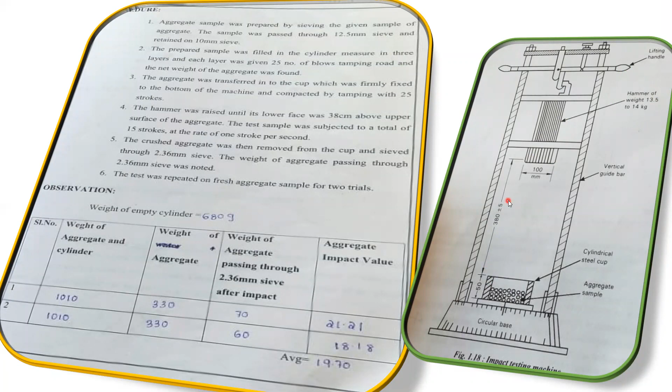Yeah, this height from here to here, the height will be 380 mm, right? And the weight of this hammer will be around 13.5 to 14 kg.

Now coming to the procedure, we'll quickly go through the procedure once. Yeah. So aggregate sample was prepared by sieving the given sample of aggregate. Again, you have to do the sieving here. How we are going to do? You have to pass the aggregates through 12.5 mm sieve, and whatever is retained on the 10 mm sieve, that we need to take. The prepared sample was filled in the cylinder, measured in 3 layers, and each layer was given 25 blows with the tamping rod, and the net weight of the aggregate was found.

Again, in this particular cylinder, you have to fill the aggregates, whatever is retained on 10 mm, you have to fill into this. So when you are going to fill, you have to make sure you're filling them in layers like we did in the previous case. Fill it in first layer, give a tamping for 25 number of times. You have to do the tamping, then again fill the second layer, give 25 number of tamping, again fill it, again give the tamping, so that this top surface will be filled with all the aggregates. So the tamping is done so that you don't have any voids there.

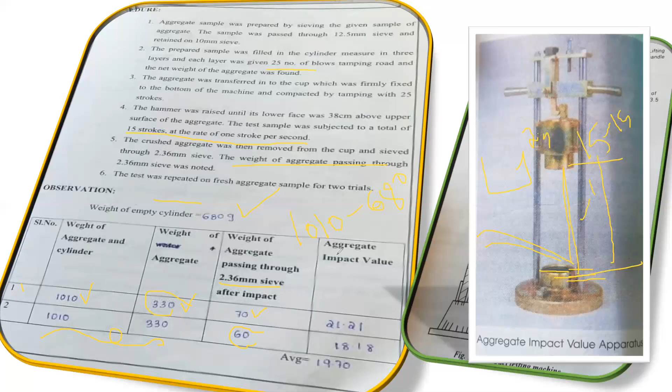So this is one trial you have done. Similarly, you can try to do another trial also. So in the other trial, this is what they have done. Again, you have taken the same thing, and finally in this case only 60 grams of aggregates you have got that passed through 2.36 mm sieve. Now coming to the aggregate impact value, again it's the same formula. How do you find this? Whatever is passed through that, that is 70, this is passing, right?

70, that is, let us say this is W2 for me, and this is W1 for me. What is the weight of the aggregate? That is 330. Since I want to find it in terms of percentage, I'll multiply this by 100. Try to do it manually. That is 70 divided by 330, you're going to get 21.21%.

And for the second sample, you're getting 18.18%. Try to do the average of this, you're going to get 19.70. So this is in terms of percentage. And what is this? This is my aggregate impact value. Now what is the practical application of this? We'll try to see. Now to put it in a better way, we'll see the calculation part as well.

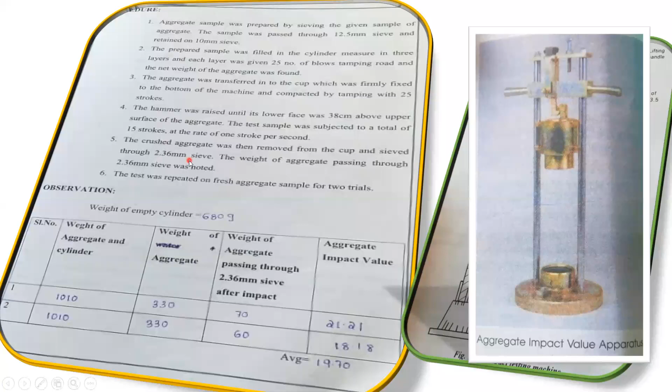So again, quickly we'll go through this. Empty weight of a cylinder is 680 gram. Weight of a cylinder plus aggregate is 1010 gram. Weight of aggregate will be 1010 minus 680. If you do, you are going to get 330 gram. Let us say this is W1, and weight of aggregate which is passing through 2.36 mm sieve we'll denote as W2, which is 70 gram.

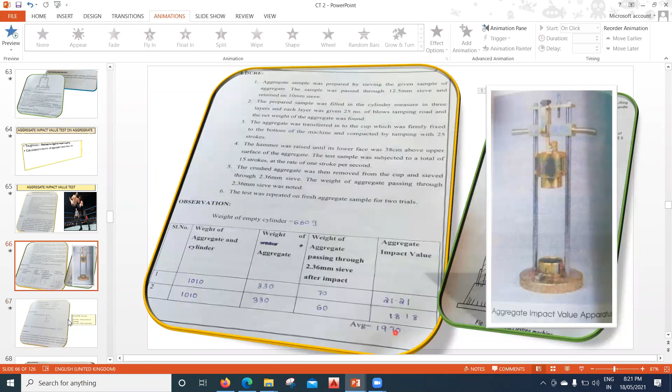Now coming to the calculation part, aggregate impact value will be W2 by W1 into 100. W2 is 70. 70 divided by 330 into 100. You're going to get 21.21%, right? So the aggregate impact value of a given sample of a coarse aggregate is 19.70, because after taking average, you have got 19.70. You can see it here. After taking the average, we have written it here as 19.70. If you want to take only a single sample, you can do that as well.

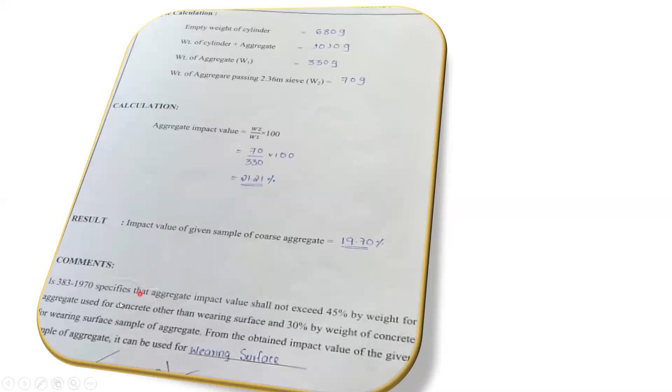Now coming to the comments, it's the same thing we saw in the previous case. According to Indian Standard 383-1970, aggregate impact value shall not exceed 45% by weight for the aggregate used for concrete other than the wearing course, and 30% by weight for the wearing surface. If you're using an aggregate for the wearing course, it should not be greater than 30%, and other than the wearing course, it should not exceed 45%.

So if aggregate impact value is more, that means my aggregate is not good, right? As far as possible, this percentage should be very less. Let us say 10%, 15, 20, 25. It should not go beyond 45 at any cost. And if it is going beyond 30%, then we cannot use that in the surface course of the pavement. Aggregate impact value should not be greater than 30% for the surface course of the pavement. And for any other construction, we have to make sure my aggregate impact value is less than 45%.

So if you are getting an aggregate impact value of more than 45%, then you have to discard that aggregate and order a new aggregate, so that you're going to satisfy this particular condition. So I hope this test is understood.

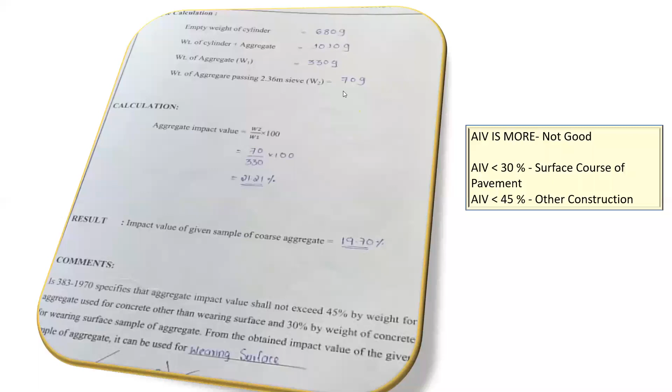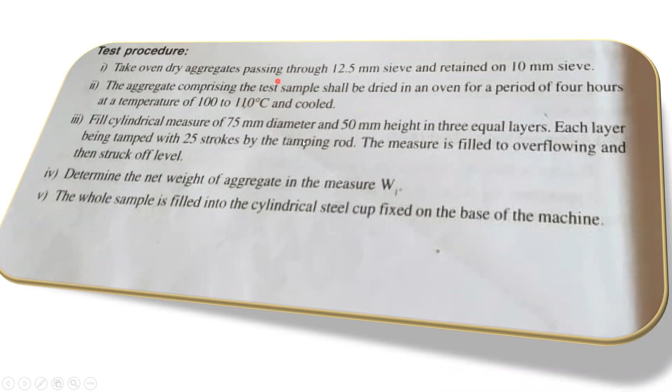Before that, if you want to write it in a very short way, you can follow this test procedure. That is, take the oven dry aggregates passing through 12.5 mm. Instead of the previous one, you can write it in this way also, and then write all these things. A hammer of 14 kg is raised at a height of 380 mm, and 15 blows are given. These points are very important: 14 kg, 380 mm height, 15 blows, and 2.36 mm sieve.

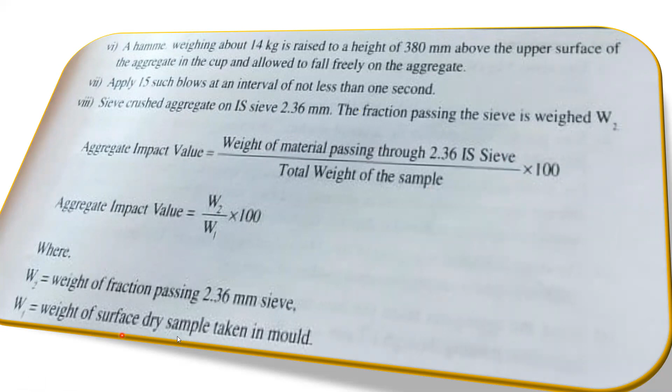Then aggregate impact value you can write as the weight of the material passing through the 2.36 mm sieve divided by the total weight of the sample multiplied by 100. So the aggregate impact value will be W2 by W1 into 100, where W2 is the weight of fraction passing through 2.36 mm sieve, and W1 is the weight of surface dry sample taken in the mold. So I hope this test is clear, how to do the aggregate impact value.

In the next lecture, we'll try to see the other test, how it has to be done.